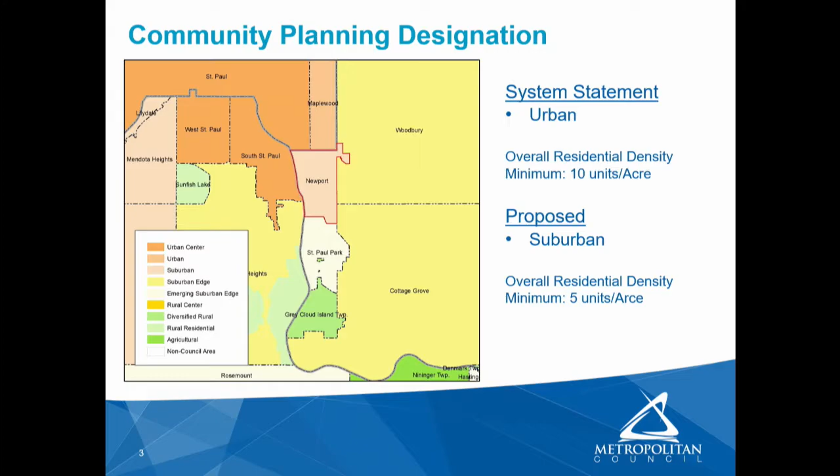A little summary regarding the community. Newport is located in the southwest portion of Washington County. It's located in Council District 13. Its wastewater plan is consistent with the growth forecast that the council has assigned to the community.

The plan reflects its ability to accommodate this growth through a combination of new development and redevelopment within the community. Its land use plan guides residential land uses that reflect an overall minimum sewer residential development density of 6.3 units per acre, so it satisfies that minimum sewer development density of 5 units per acre.

The plan states that the city currently has 78 subsurface sewer treatment systems, or septic systems, within the community, each serving an individual specific property. The city has generated excess peak wastewater flow discharges into the regional wastewater system, which has resulted in the assignment of an I&I mitigation work plan to the city by the council.

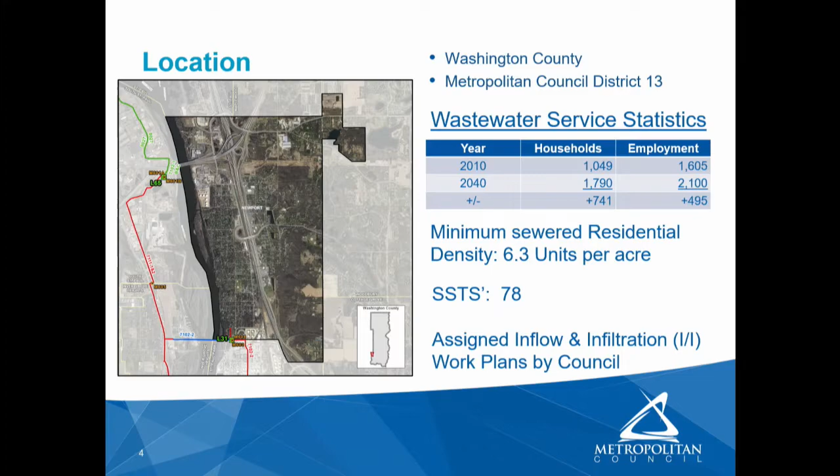As such, the city has been identified as a contributor of excess I&I to the regional wastewater system. Since 2011, the city has completed more than $460,000 in local I&I mitigation work, with over half of that work being funded through multiple state bond grants administered by the council.

The majority of the work completed by the city has focused on public infrastructure improvements, but they have also completed some private property work. It's also important to note that state bond monies can only be put toward work on the public side of the wastewater system. The plan includes policies, strategies, and goals for I&I reduction in both the public and private portions of the wastewater collection system.

And it includes an ordinance that prohibits the connection of downspouts, rain leaders, and sump pumps to the sanitary collection system.

Planning done by the region and the communities within it clearly supports Thrive-driven outcomes and principles. Sound asset management principles have provided a framework for stewardship of the wastewater system that supports a prosperous region. The wastewater system protects public health and the environment.

The management of our wastewater systems has led our region to sustainable practices such as best management activities for our infrastructure assets and inflow and infiltration programs, to name a couple of examples. This work is ongoing and will continue in the foreseeable future.

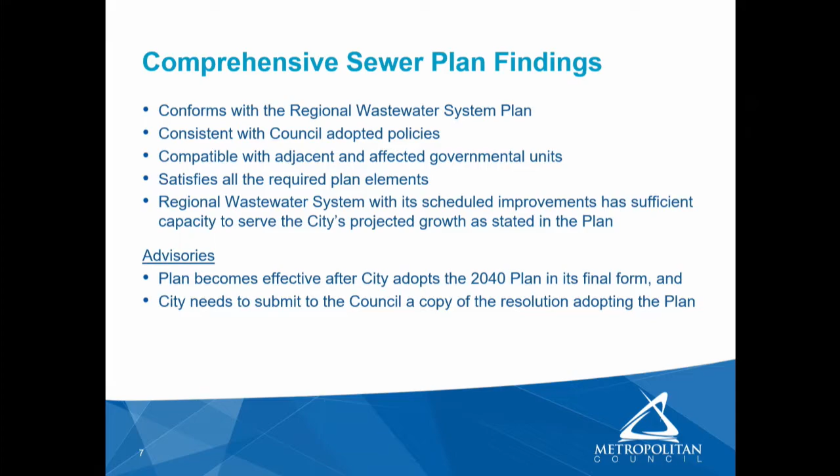There are also 2 advisory comments included in the business item. These are standard to all plans that come through the council for action. The plan will become effective after the city officially adopts its final 2040 plan, and the city is required to submit a copy of the city resolution that adopts that plan.

So with that, the proposed action before the committee today is that the Metropolitan Council adopt the advisory comments and the review record, and approve the proposed recommendations of the Environment Committee as written in the business item, which includes the approval of the City of Newport's comprehensive sewer plan component of the city's 2040 comprehensive plan.

So with that, I'm happy to answer any questions and then also take any suggestions on what the committee might like to see in future presentations. Any questions for Mr. Colvin?

Councilmember: Thank you, Chair. I just have a point of information question, but on St. Paul Park, is that considered the emerging suburban edge? I just couldn't tell by quite exactly the color.

Mr. Chair and members of the committee, St. Paul Park would also be a suburban edge. So a suburban edge community is one that, in terms of its land development patterns, would be a little less urban, if you will, than what a suburban community would be.

Okay, thank you very much. Any other questions for Mr. Colvin?

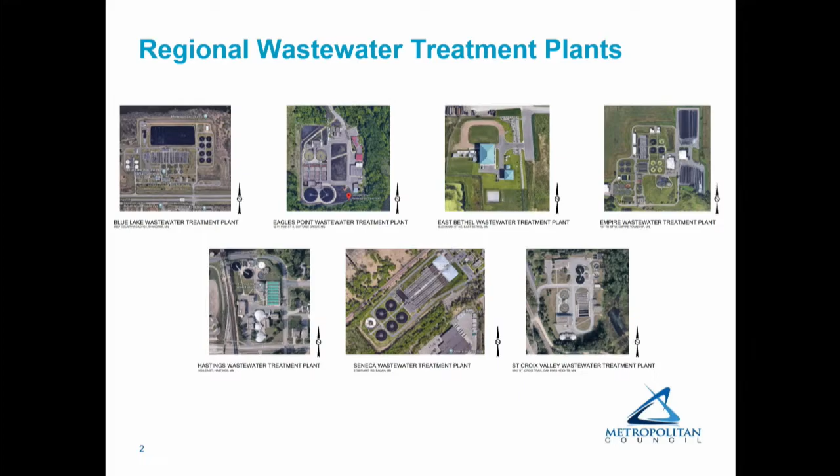On February 20th, 2019, quotes were received for the new telecommunications equipment for the regional wastewater treatment plants. The lowest responsive and responsible bidder bid was submitted by CDW Limited Liability Corporation in the amount of $1,280,787.24.

On that basis, staff recommends that the Metropolitan Council authorize its regional administrator to award contract 18P156 in the amount of $1,280,787.24 to CDW Limited Liability Corporation for the purchase of network equipment, which includes access points, switches, and controllers.

I guess I'll start off with a question. One thing I know, just at about a 50,000 or maybe 100,000 foot level, is the SCADA -- I imagine you have some sort of a SCADA type system, and does this equipment play into that? Is it important for SCADA?

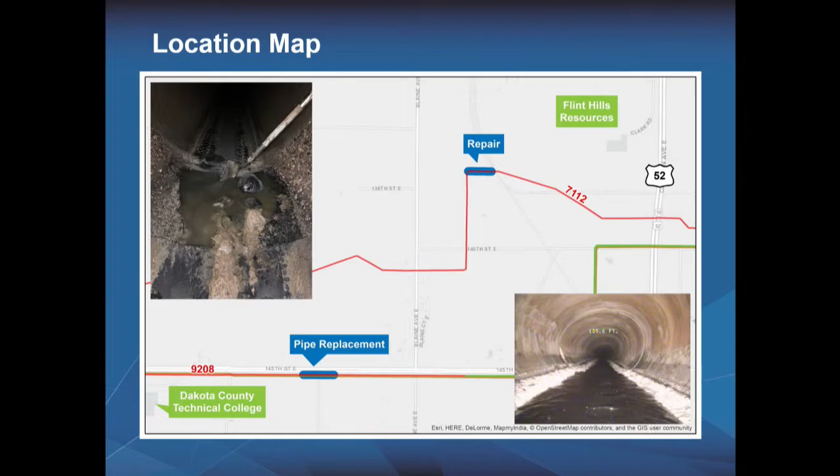So we've come up with a repair scope and estimate. Engineering, and that scope includes engineering services and support to repair the work.

Interceptor 9208 and replacement of 500 feet of lineal pipe, a 36-inch diameter, along Interceptor 7112, installation of new structure and rehabilitation and replacement of the 48-inch diameter segment of pipe. That's the one with a hole in it.

Both areas need temporary wastewater conveyance and dewatering work, and then there's surface restoration work. The total estimated cost for the two locations, the two separate areas, is $1.2 million, and the cost of the work will be funded out of our 2019 MCES authorized capital program.

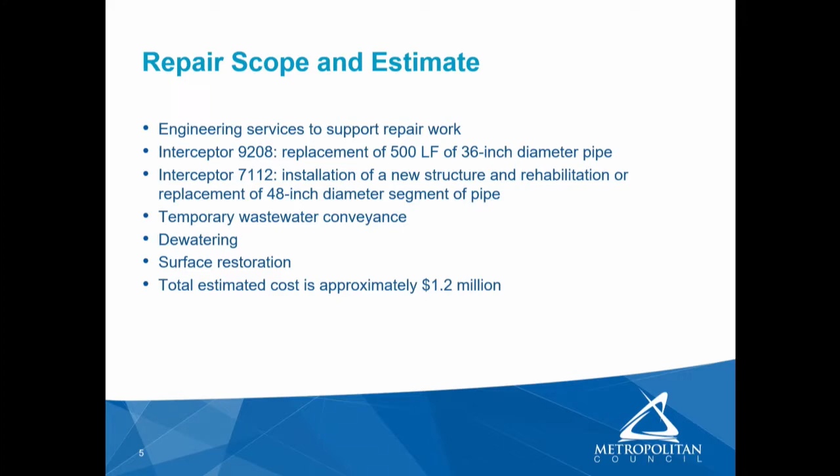I have to do this at least once.

So this action advances the Thrive outcomes for stewardship. Public financial resources will be invested efficiently and effectively to maintain and restore existing capacity to existing wastewater infrastructure, which protects our region's natural resources.

So our proposed action is that the Metropolitan Council ratify the justification for the declaration of emergency for repairs to Interceptor 9208 and 7112 in Rosemount, which is attached to this business item. And I would be happy to take any questions from the committee.

I have a question. How do you temporarily convey? I knew that question was coming. It's a simple question, and I'm sure it's not a simple answer. Oh, we have pictures coming up.

The best way I can explain it: we can never turn off our wastewater. We can't back people up, we can't spill it on the ground. It's kind of like repairing your garden hose that has a leak in it without ever stopping watering your garden.

It involves making connections upstream and downstream. In this case, we pump the flow temporarily around the bad section of pipe so we can get into the pipe and do our work, and then we have to convey the flow back into the pipe. So you'll hear over the next year or so quite a bit of talk about temporary conveyance. It's one of our major expenses in any repair in the interceptor system.

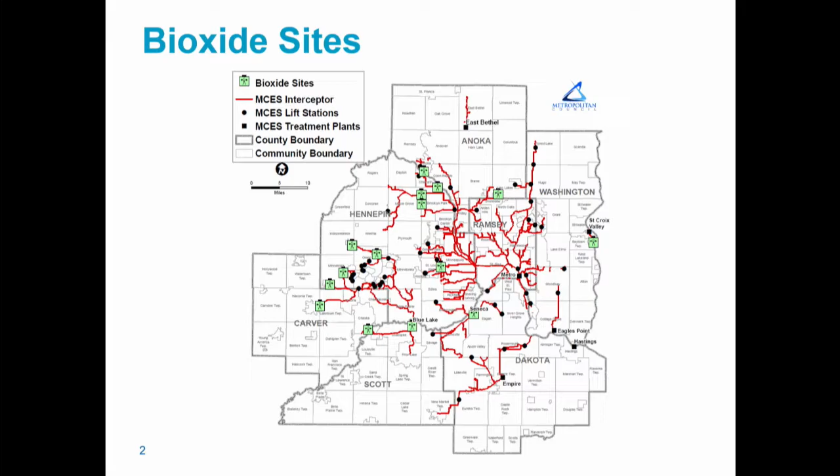We collect and convey wastewater from communities and take it to one of our 8 wastewater treatment plants. To control odors out in the system and control corrosion of the sewage on our conveyance system, we have for many years added a liquid chemical called nitrate salts, or bioxide. You'll see bioxide sites on the map in front of you. We've had a successful program for a number of years, with 15 locations in our collection system where we're adding this liquid chemical to the sewage flowing by, for the purposes of controlling odors and reducing the corrosive impact on the conveyance system. We've contracted out for these services for years, and the contract has been with Evoqua, our current vendor.

To provide the nitrate salts, which is to provide the chemical. And then what's important is, as part of the contract, they also provide the equipment at the 15 sites. The equipment will include storage tanks for the liquid chemical, and it will include the pumping and distribution equipment, as well as they provide services. They go out and add chemicals to the system, they change the dosage as needed, they ensure that everything's working fine.

So as part of the original contract, Evoqua bid and was a successful bidder to provide the liquid chemical as well as the storage tanks and the chemical delivery equipment at the sites.

This has worked out good, and then subsequently we've needed to bid other contracts. Well, what's happened is because Evoqua put in the original equipment, they have a competitive advantage over other suppliers of the liquid chemical. So we've gone through a bidding process here in recent years where we've gone out, we've pursued competitive bids, but we come back with Evoqua has this competitive advantage, and therefore we're not getting responsive bids from other suppliers.

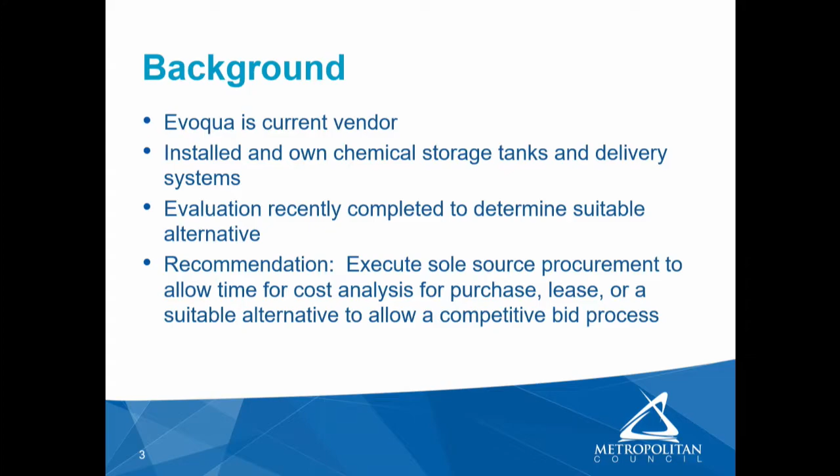We'll try a different Thrive approach. So the Thrive lens analysis for this, stewardship. The public financial resources will be invested efficiently and effectively to maintain proper operation of the Metropolitan disposal system, protecting the region's natural resources.

So the proposed action before you today is that the Metropolitan Council authorize its regional administrator to execute a sole source contract with Evoqua Water Technologies Inc., not to exceed $2 million to provide nitrate salts, odor control equipment, and odor control services to the Interceptor Services Business Unit for the period of May 1st, 2019 through January 31st, 2020.

And I'd be glad to take any questions. Questions for Mr. Arenas? We'll start with Councilmember Fredson, work our way this way.

Thank you, Chair. I'm just interested to know why bioxide sites are located where they are. I'm looking at Ramsey County, and there doesn't appear to be any in Ramsey County, maybe a cluster around Lake Minnetonka. Did you see more? Mr. Chair, yes, we've determined these are strategic locations that will most likely generate odors or have generated odors in the past and or have presented some corrosion problems for some of our conveyance equipment through there. So not every pipe and not every location necessarily provides those conditions, but these we've determined are optimal locations.

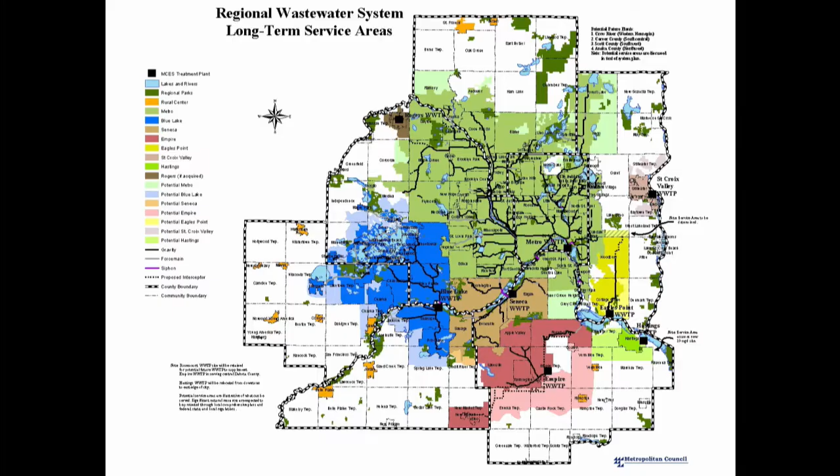So again, because our plants are located close to rivers, we are very in tune to what the spring forecast is for the rivers. So we're one of many agencies that are tied in with the National Weather Service and watch closely their predictions for floods or their projections for floods for the coming spring.

So we last got an update from them on March 18th. They actually are working off of data from March 4th. This is the way they work. They kind of get all their information over the winter, going into the spring, and then provide this projection. But I'll hit a few highlights that their report showed.

So this was as of March 4th, some of the typical spring flood factors. So the soil moisture. For those of you who recall, we had a wet autumn in 2018, and it left the soil moisture above normal before the freeze up, especially across southern Minnesota.

And I talked about some of our plants are in the Minnesota River. What I've found, and I've watched this over the years, a lot of what happens in southern Minnesota, in the Minnesota River Valley, plays into what happens to the river right outside our front door.

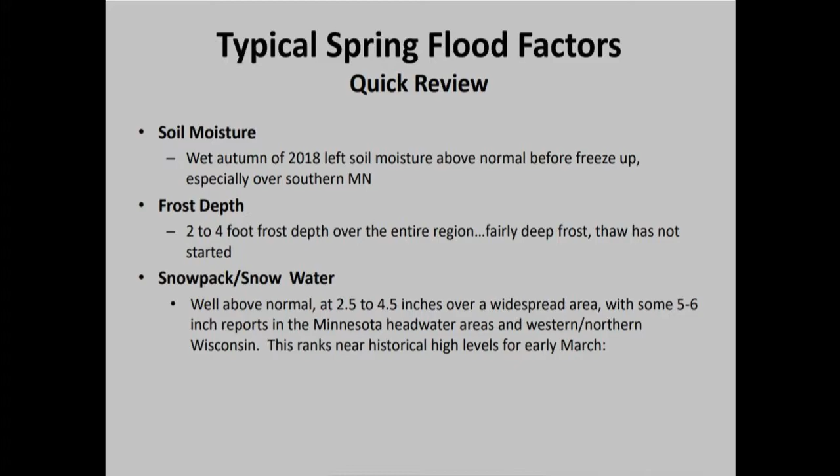This ranks as a historically high levels for early March. So things were kind of teed up for a potential flood season.

So one other slide from the National Weather Service, what they call snow water equivalent ranks. So they go out and not only measure the depth of the snow in the region, but just how much water would be contained in that snow when it melts.

So what it says is that there's plenty of energy out there, or they call it fuel, for a potential flood.

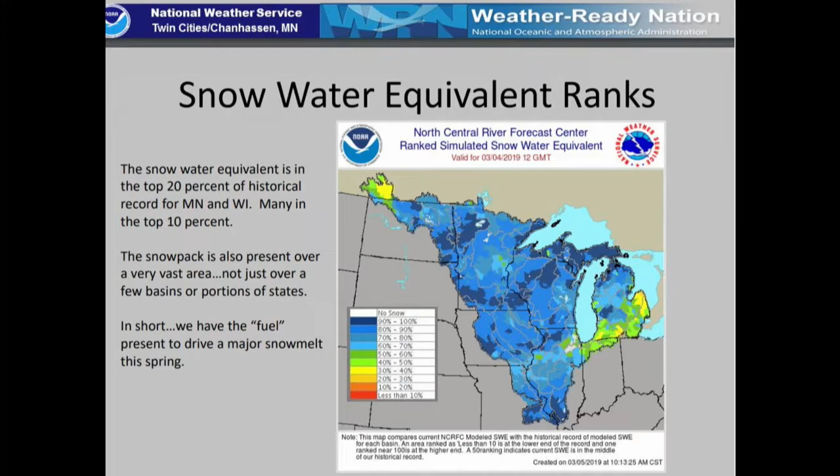So this one, and I'm an engineer, so I'll try not to get too buried in the details. That said, I think I need to unpack it a little bit, and I probably have to use the graphics a little bit. So we'll see how this works.

So the National Weather Service prepares these every spring. This one we call the probability exceedance chart. In this case, this is for their river gauge here in St. Paul, located right at Robert Street. It's about the Mississippi River and its likelihood of reaching certain levels.

We can use this to project the potential risk to the Metro plant, since it's just downstream of this. So a couple of takeaways: the blue line at the bottom is 60 years of historical data, showing on average, from the March, April, May period under normal conditions, the chance of exceeding certain levels.

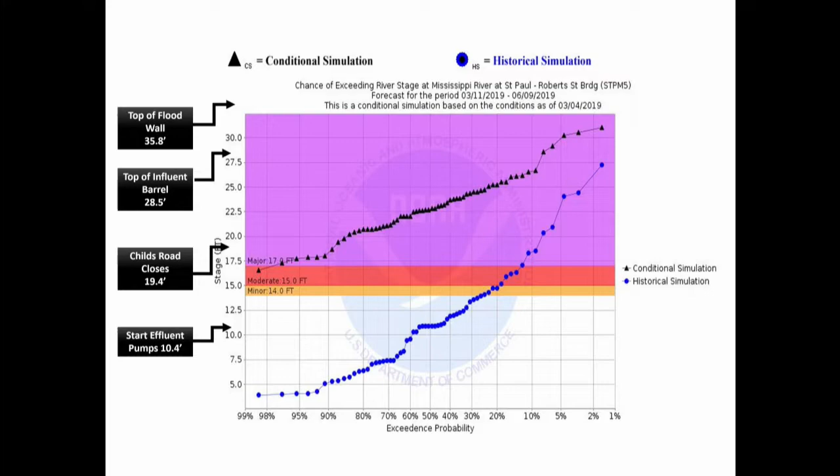I've got some important stages for the Metro plant on the left-hand side of the slide, starting with the effluent pumps. According to this, put together back on March 4th, we probably would be starting the pumps this week. Like I said, it worked out for us — we started the effluent pumps late last week.

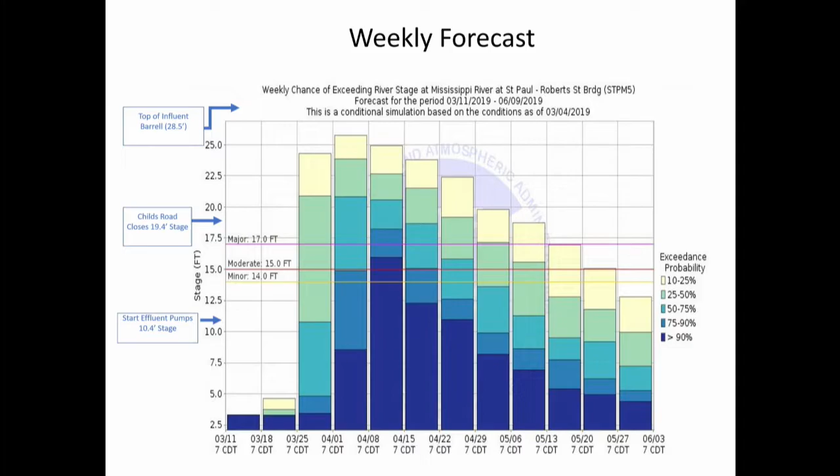What I will say is, I've been with the organization for over 30 years, and we've dealt with a lot of floods, so we're good at dealing with floods. We've got a well-prepared and well-developed flood plan. Our flood committee every year in January pulls the flood plan out, gets together, looks at if it needs to be updated, and starts looking at projections. Some years all the work that committee does doesn't have to be implemented, but we want to be prepared.

We're in the business of providing continuous service in regards to wastewater treatment, and the way to do that is to be able to hold the rivers at bay. As far as the Metro plant flood preparations, there are a lot of activities that take place, but some of the highlights include emergency generators.

Our plants are very mechanically complex and use a lot of electrical energy. We have a reliable feed of electrical energy, but because we're so dependent upon it, particularly for the pumps lifting flow out of the plant, we need to be ensured we have backup power available if the unforeseen happens. So we have emergency generators on site. They're well maintained, and we have plenty of fuel oil for them.

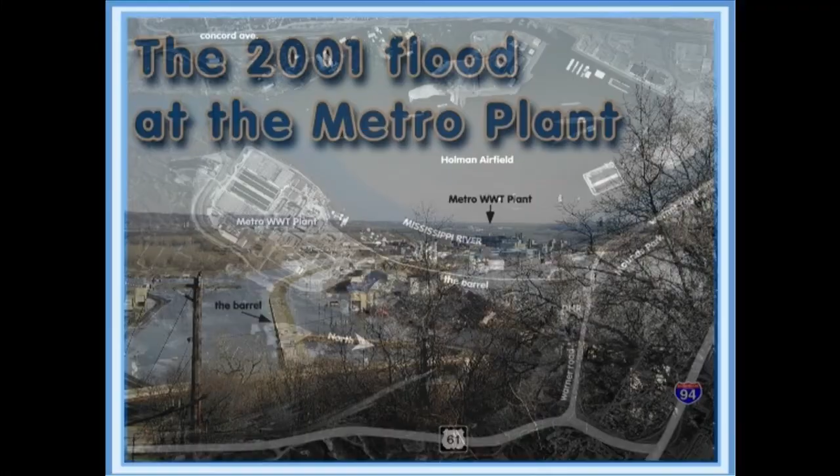You see a little arrow pointing out the plant there. This again is 2001, obviously right over the Metro plant. So a couple of features I'll point out to you here.

So we talk about the barrel. The flow coming to the plant comes from the north, and the Metro plant is a large plant, and the pipes coming into the plant are large. The top of the pipe coming in is basically the width of a good-sized single-lane road, plus it's elevated about 9 feet above the normal level of Child's Road. So it's a good high avenue for us to get our employees into the road, into the plant.

We'll talk about the temporary ramp that we build to use that. But if you look at this photo, you see the barrel clearly out of the water, and you see the Metro plant high and dry, but surrounded by water. And on the upper side of that photo, you'll see Holman Field.

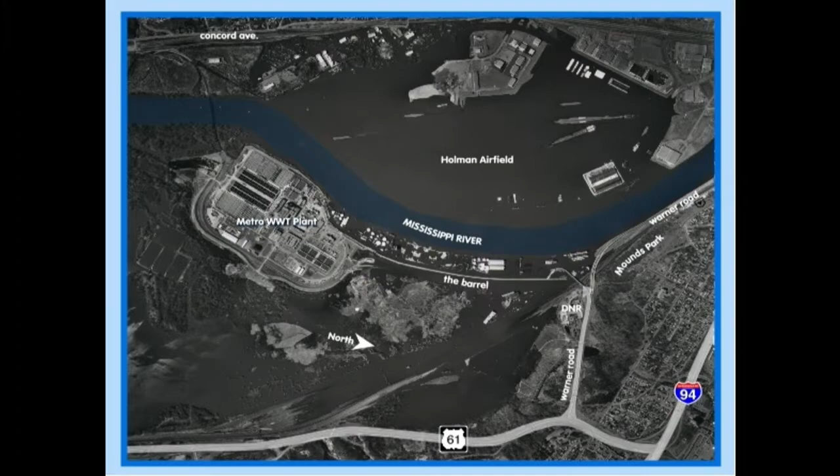One thing that's changed since 2001 is Holman Field got tired of their runways getting flooded out, and they put in a flood wall, I think about 5-6 years ago.

So again, I talked about the barrel and wanting to get to the top of that. We need to figure out how to get ourselves, or our vehicles, to the top of that. So we just build a temporary road right over Child's Road that our employees can drive from - it's really an exit ramp, a higher exit ramp to Warner Road. We can get off of that ramp, onto the temporary ramp, get us on top of the barrel, and safely drive into the plant.

We have about almost 300 people that call the Metro plant their home base. Not necessarily all of them need to be there all the time, but many of them do, and obviously our critical employees need to get into the plant.

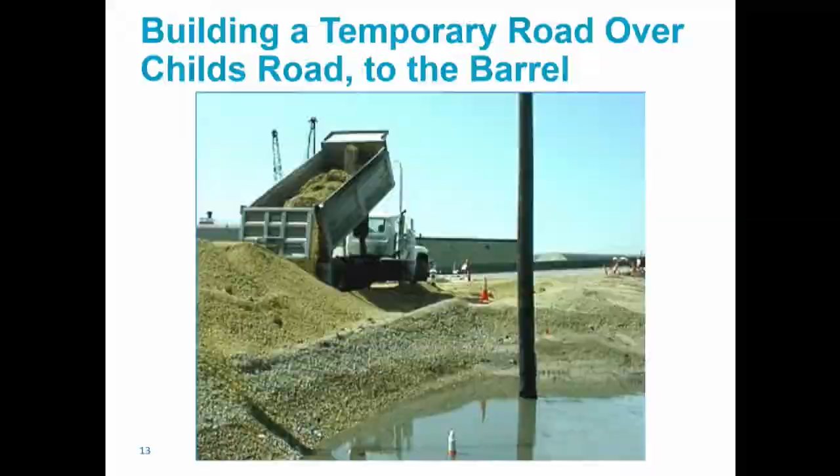So this is them constructing the temporary ramp. Hard to tell, but on the right would be the ramp that would take you up to Warner Road. On the left is the barrel, or the top of our pipe. They're taking gravel to build that temporary ramp. At this point in time, Child's Road, which they're on, was not flooded out.

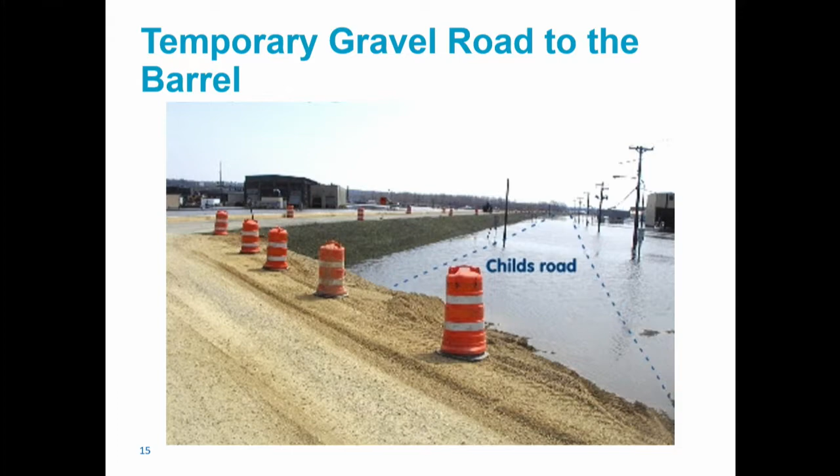This is on the temporary road looking towards the barrel, and you can see now Child's Road has some water on it. Same sort of view here, just stepping back a little bit, letting you see even more water on Child's Road.

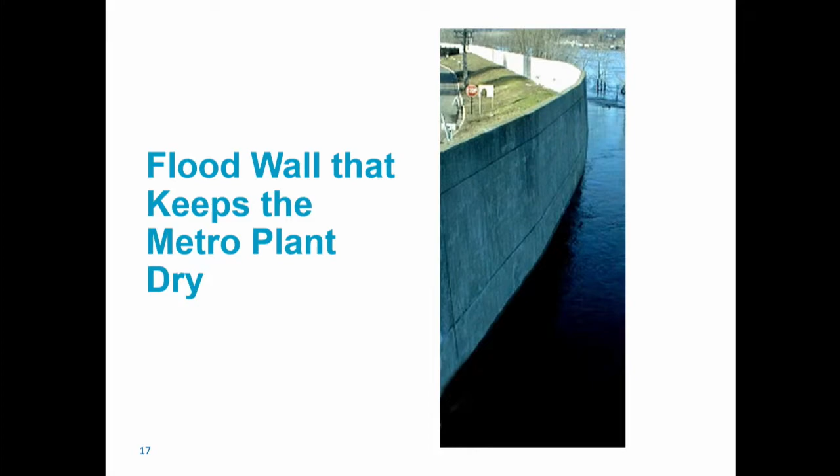Talked about the flood wall, the concrete flood wall. It's been in place since the early 70s, and it's worked just fine for us, again, to keep the river at bay.

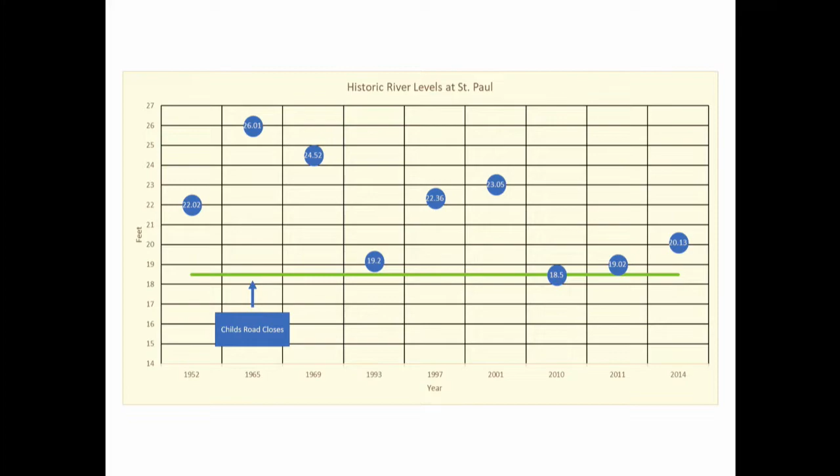We have tunnel systems throughout the Metro plant, and the tunnel systems obviously got flooded with water. A lot of equipment got damaged. After the floodwaters receded, it took a long time to get the plant back up and operating.

That's a lot of focus on the Metro plant. Like I say, we have 3 other plants that we are concerned about.

Maybe I can do that from here. Oh, I better get up there.

So this is our St. Croix Valley plant, obviously on the St. Croix River. They have some different issues and different stages that come into play for them. You can see that for the St. Croix River, the conditions from this spring are much higher than historical conditions, so we would expect some problems there. That said, St. Croix actually sits pretty high, and we have not had to do many mitigation measures at this point, and the projected crest shouldn't cause us much problem.

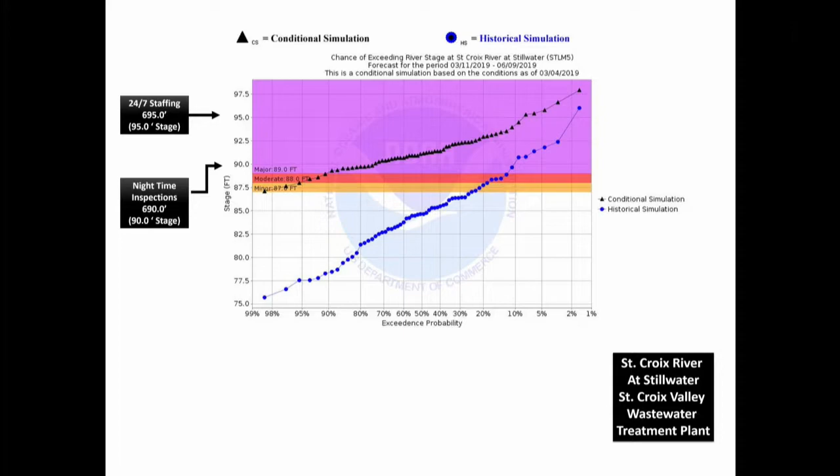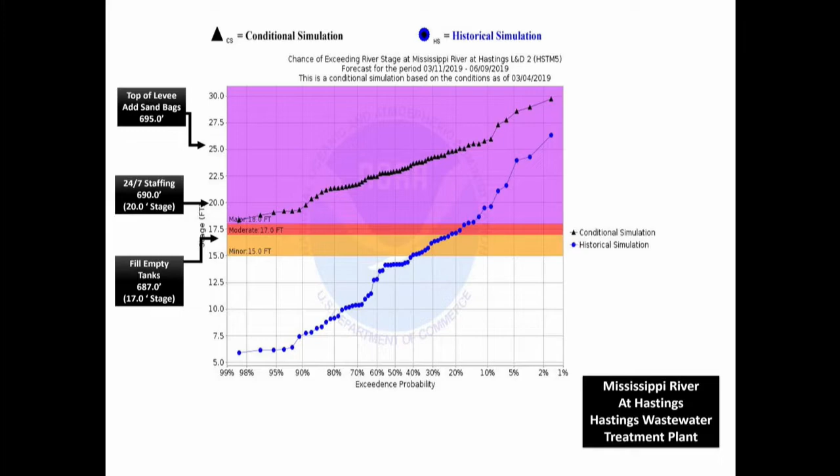Actually, we're watching the river. The Minnesota River seems to have reached its peak and seems to be coming down. We've really had ideal melting conditions over the last 10 days. No extra rain, and some nights have been getting below freezing. So the river seems to be headed in the right direction.

But at 32 feet, we have large pumps at Blue Lake as well that lift the flow out of the plant. So we started up those pumps about a week ago or so. And the plant staff's doing a great job of handling those flood conditions.

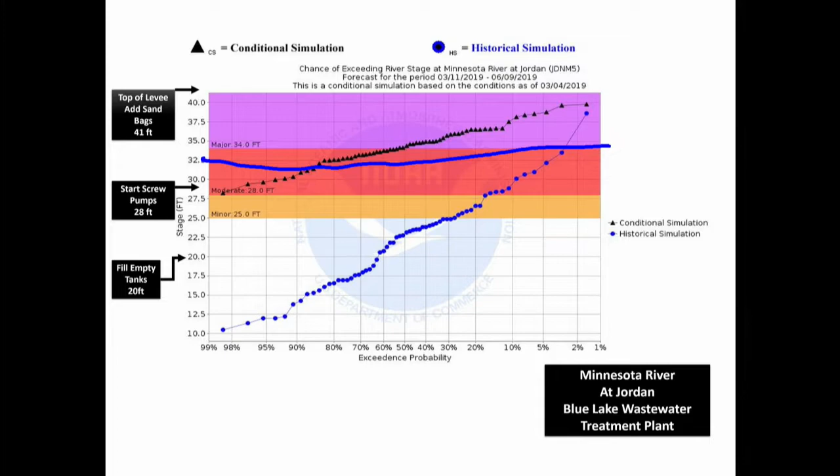Oops. I forgot, Susan.

So again, a little background on our flooding. That said, we did have to declare an emergency for some flood mitigation services for our treatment plants.

Referencing the business item, I've already talked about the spring conditions and how it's ideal for flooding, and that we need to build the temporary access road across Childs Road for access to the plant. There's costs associated with that. Additional costs come up because the Metro plant isn't readily accessible via Childs Road.

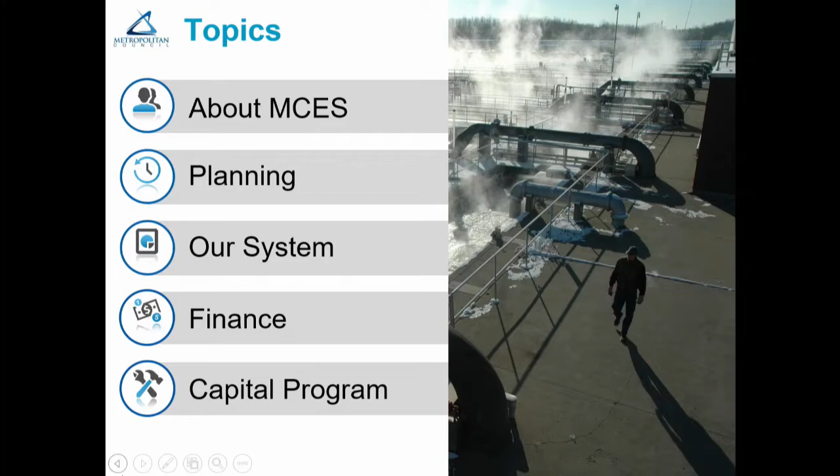Our vision is to be a valued leader and partner in water sustainability. This reflects the emphasis that we place on regional partnerships that we have with our customer communities to ensure clean water and adequate water supply for a thriving region for generations to come.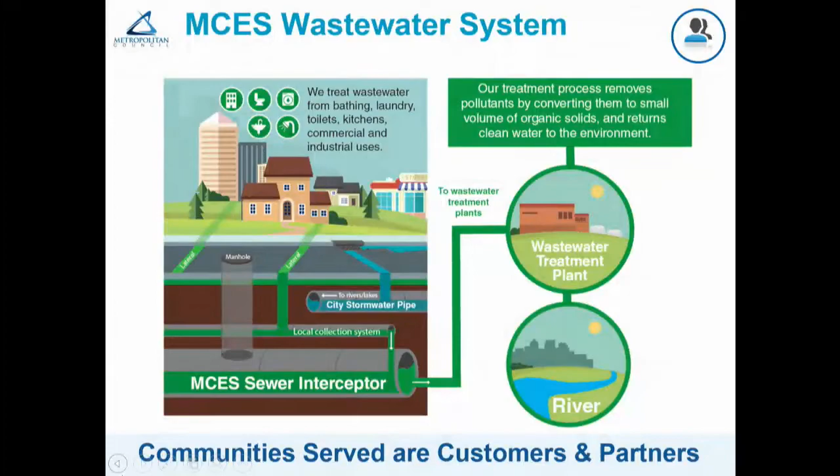So wastewater treatment and conveyance in the Twin Cities metropolitan area is performed as a partnership between the council and our customer communities, and I can't stress that enough. We succeed when our communities succeed, and they succeed when we succeed as well. The wastewater system is incredibly interconnected. We have 7,500 miles of privately owned service laterals that connect homes and businesses to 5,000 miles of community-owned local collection systems. These collection systems then connect to 610 miles of MCES interceptor sewers that convey wastewater to the treatment plants. So our communities are our customers, but they're also our partners.

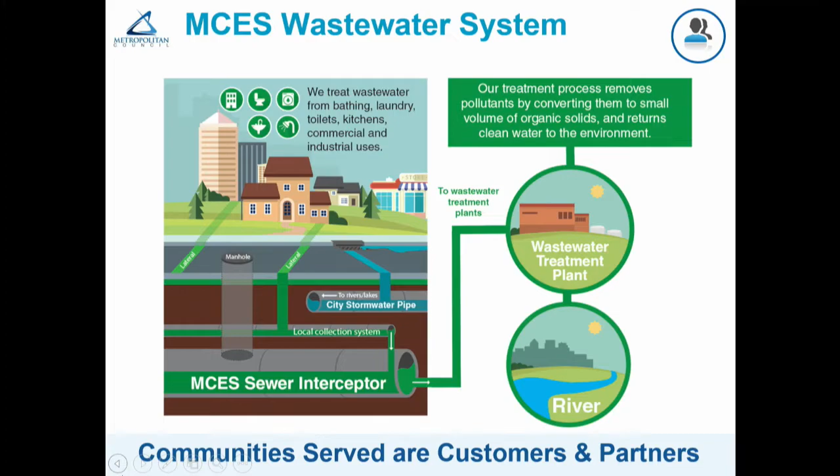Yeah. Grab the remote. Sure.

Mr. Chair, members of the committee, again, I'm Sam Paske. I serve as the Assistant General Manager for the Environmental Quality Assurance Department in Environmental Services. I'll be talking to you a little bit about planning today. We're just scratching the surface. Kyle spoke originally about a plan approval, so this is part of that process overall.

As the regional planning agency, you've been briefed on this, no doubt, to some extent already. We are responsible for planning, but also for operating several regional systems. And in doing so, we coordinate extensively with cities, counties, watersheds, state agencies, and many others to ensure orderly economical development in a livable Twin Cities region. So this is a very high-level scan. We'll have a deeper dive coming for you soon.

So the overall structure: we are guided here, and this committee deals expressly with the Water Resources Policy Plan. That plan is the guiding policy and planning document for our division, and it fits into the Metropolitan Area Development Guide, which is Thrive MSP 2040, the slide you've seen many times tonight. You won't see it here, I believe. And that framework is, again, all about the orderly economical development of our region. The Water Resources Policy Plan also includes policies in the long-term wastewater system plan.

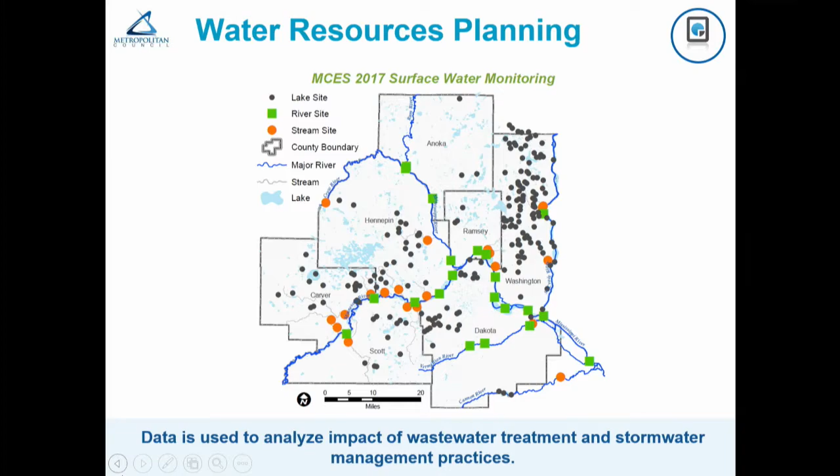Water supply plan. The Met Council supports local water suppliers in their planning efforts. We are not a drinking water supplier, and we do not intend to be one. The region has abundant surface and groundwater sources, but there are many challenges.

We support 8 local water supply working groups with participation from the Met Council and state agencies, and over 50 local water suppliers are represented in these groups. They collaborate on local issues with our support and with support from the state's Clean Water Fund. Current work includes improving water use efficiency, planning for new water supply options in the north and west, and improving the information available for planning.

Burnsville and Savage are an early success story of this approach, where they faced a shortage of groundwater due to a well permit restriction. The DNR is the regulator for groundwater, and they found an innovative way to use water from a quarry instead of the wells they no longer had access to. That model of local collaboration has been developed further around the region, with now 8 groups working together to solve unique local issues that differ across the region.

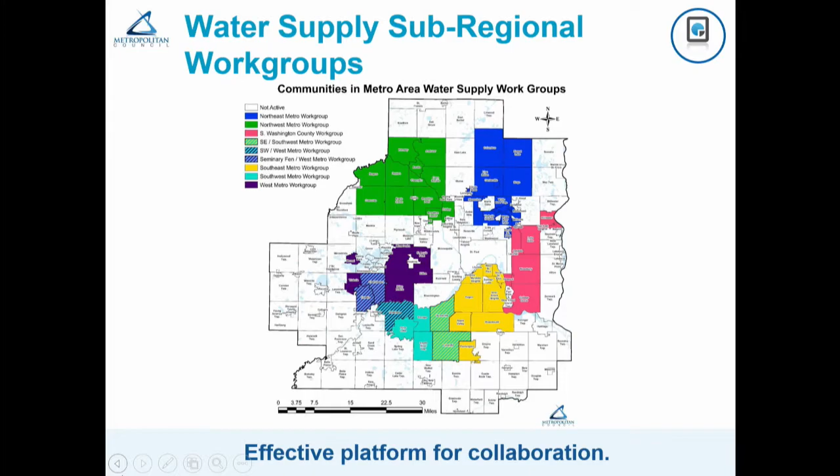So there will be more about planning over the months to come. The rest of this briefing focuses on wastewater operations, and Mike Moranis, I'll get it to you, Mike.

Thank you, Sam. Yep. Mr. Chair, committee members, I am going to just fly at maybe a 5,000-foot level here, just to introduce you to our system.

As said by Janine and Sam, would love to take a deeper dive. Would love to get you out to our facilities. Really, touring our facilities is the best way to get your arms around the complexity of our system.

We talked a lot about the interceptor system today on previous business items, so I won't repeat too much, but again, 610 miles of interceptor pipe bring the flow from 109 communities. Within those communities, for perspective, there's about 5,000 miles of collection sewer that those communities own and operate. As far as size of pipes, some of the pipes coming to, say, the Metro plant are large enough that you can drive a car through them. So we're talking some good-sized pipes here, but they need to handle a lot of flow.

In addition to just the pipes, we have 60 lift stations. We love to use gravity to move our flow along, but there are times geography gets in the way and we need a pumping station that basically lifts the flow up over the hill so we can keep it moving along.

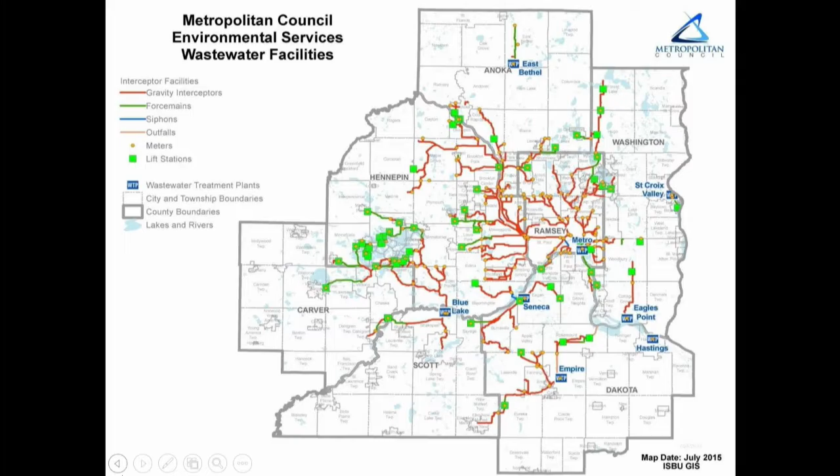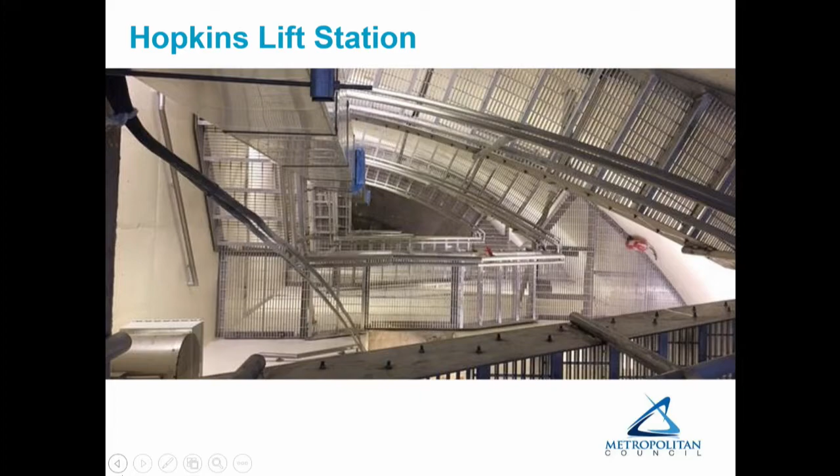Just one picture for you, the Hopkins lift station. Again, we have 60 some lift stations. They can be very mechanically complex. Most of them include their own odor control units. And again, we'd love to get you out to see some of these firsthand.

We'll run through the 8 wastewater treatment plants that we own and operate right now, relatively quickly. The East Bethel plant is located in northern Anoka County. It's our newest and smallest plant, and it's been in operation approximately 5 years or so.

A few specifics about it: it only takes one operator to operate that plant, generally just on weekdays. The other hours, the plant is remotely monitored from some of our 24/7 plants, and if a problem crops up, we'll call in an operator. As far as the capacity goes, a couple things I'll say, and then I won't have to repeat them.

When we say the capacity, in this case, is equal to 0.5 million gallons per day, that's an engineering term reflecting the yearly average capacity of the plant. We recognize the flow varies. Actually, the flow is quite low right now, about 50,000 gallons a day. The flow could vary and might exceed the 0.5 million gallons for a short period, and the plant can handle that, but we rate them on the annual average capacity.

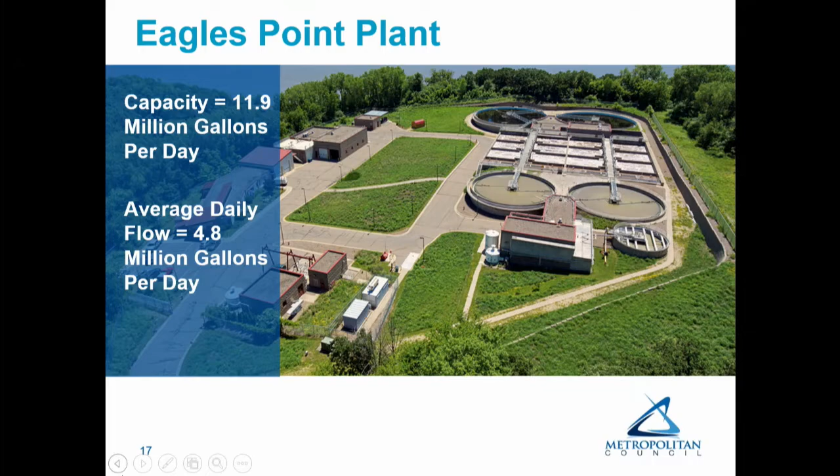The Eagles Point plant is located in Cottage Grove. It serves mainly Woodbury and Cottage Grove area. You can see its rated capacity and average daily flow right now. There's about 10 operations staff there. Again, this plant is not attended at night but is remotely monitored, and it discharges to the Mississippi.

The Hastings plant is relatively small for us. I won't repeat the capacity or daily flow. It serves Hastings and the surrounding area. We have an operating staff of about 4 people there, unattended at nights, and it discharges to the Mississippi.

Can you go back to the slide? So the Hastings plant is right on the edge of downtown Hastings, and this picture is old—it looks like there's a vacant lot with some cars parked next door, but that's actually an apartment building now, part of the city's riverfront redevelopment. We've owned land for quite some time to move that plant, but we're squeezing every dollar out of it, keeping it in use as long as it meets capacity and treatment needs rather than prematurely building a new plant. But someday that's going to have to move, and we're ready for that.

I'm used to hearing about wastewater treatment plants with plenty of buffers around them—here, not so much. I imagine odor control is particularly important, especially to those living in that apartment complex. You're absolutely right, and there's some of our other plants—you probably couldn't pick it up on the St. Croix Valley plant, but there's a set of condominiums just on the north side of the plant, basically just outside the fence line. Odors are of extreme importance to us.

There's an Xcel substation near this area too, is there not? I've talked to city council members about their desire to move this pretty decent size substation. Do you know what I'm talking about? Yes, I can't tell you exactly where, but I have it in my mind's eye. So what's the time frame for possibly making the move? We will be starting our planning process most likely this fall—very preliminary. Then we'll prepare a facility plan, which will require a public hearing and public outreach, and then we'll move into the design process. It takes probably up to 5 years to begin the design, construction, and finally commissioning.

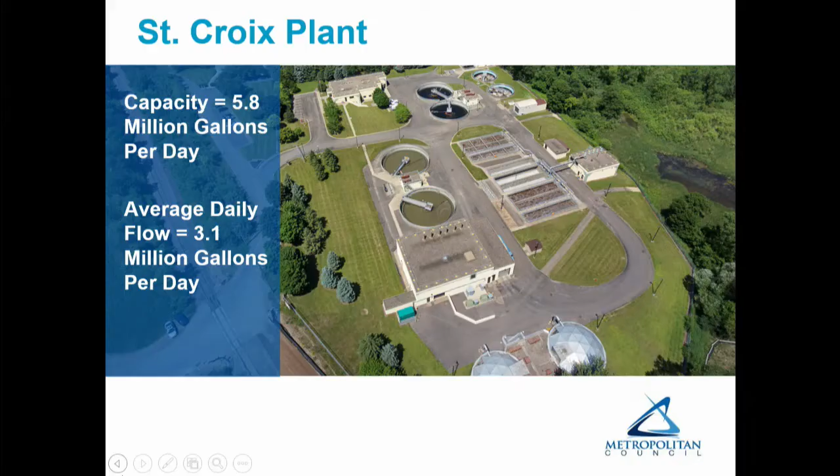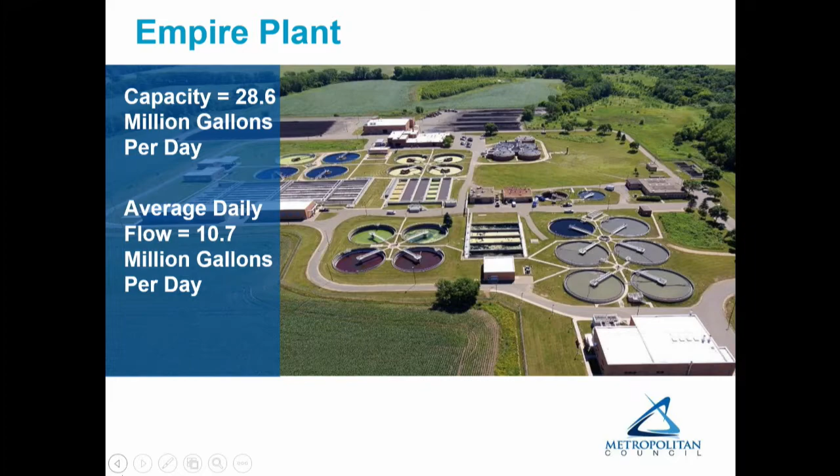I believe I covered Eagles Point. Oh, I'm going the wrong direction—that's why it's looking familiar. The Empire Plant is located in Farmington. You'll notice there's quite a bit of buffer around this plant, more out in an agricultural area. It's a rather large plant for us, serving Farmington, Lakeville, Apple Valley, New Market, that kind of area. Because it's a large plant, this is a 24/7 operation. We have about 20 operators there covering shifts throughout the week, and it discharges to the Mississippi.

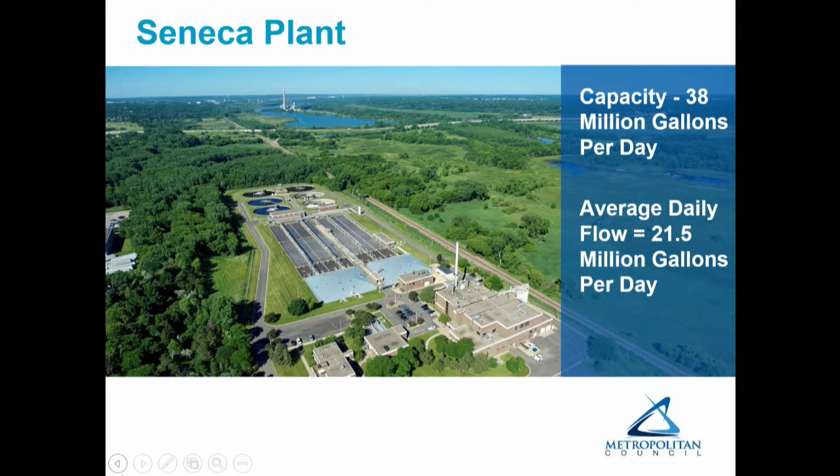Our Seneca plant is located in Eagan and serves mainly Eagan, Burnsville, and Bloomington. It's a relatively large plant, with about 25 operation staff manning a 24/7 operation there. It discharges to the Minnesota River.

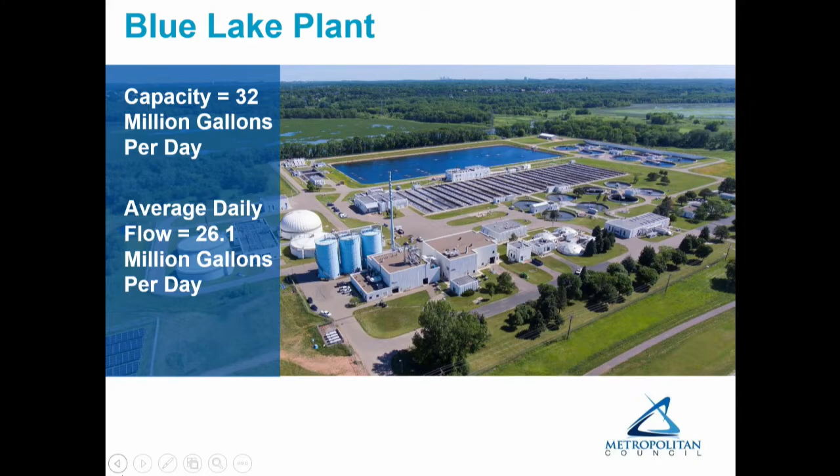The Blue Lake plant, we talked about that a little bit with the flood. Again, a large plant, it serves the western communities around Lake Minnetonka and out in that area. It's located in Shakopee, not far from Valleyfair. There's about 25 to 30 operation staff at that plant, and again, it's a 24/7 operation for us, and it discharges to the Minnesota River.

Our largest plant by far is the Metro plant, our largest and oldest plant. It's 81 years in service now for us, and it's located south of St. Paul, serves Minneapolis, St. Paul, and 60 other surrounding communities. There's about 290 people based at the plant, providing a variety of services. And again, as you might expect, we're a 24/7 operation and we discharge to the Mississippi.

I'll just talk a little bit about compliance. In our business, one of the ways that we determine the quality of our service is how well we're treating the wastewater, and are we doing it in accordance with the requirements laid out for us. So in our case, the Minnesota Pollution Control Agency issues permits that clearly spell out how well we need to treat the wastewater and then how to demonstrate that.

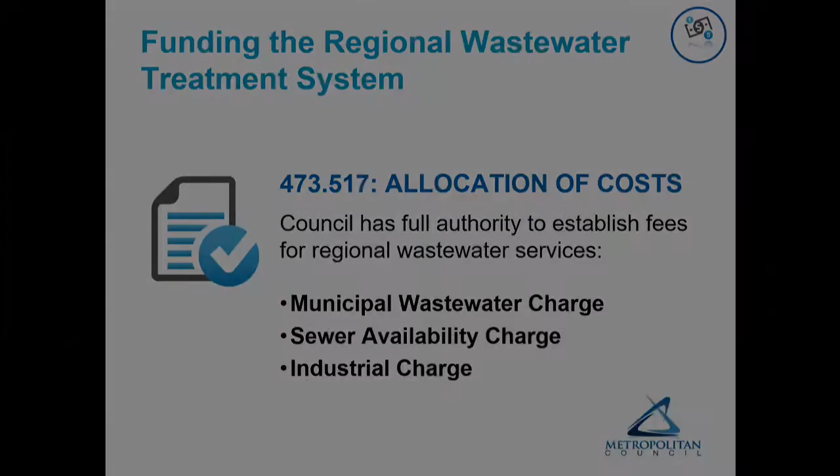Here is for 2019 our revenue sources. The municipal wastewater charge is the charge allocated to customer communities based on each community's share of the total system flow.

Mike mentioned that we have 200 metering stations. Those metering stations document the wastewater flow attributed to each community. 77% of our revenue comes from our customer communities, so cities pay 77% of our revenue. Then we have industrial charges charged to our industries for high-strength waste that exceeds domestic wastewater strength, about 4%.

We also have the sewer availability charge, which is collected from cities to pay for wastewater system capacity demand as development occurs. Some other sources include state bond fund appropriations for pass-through grants for public infrastructure, inflow and infiltration mitigation, water supply planning, and water quality monitoring. We get some tax funds from the council, typically for demonstration projects and water supply planning, and we also use some of our reserve funds.

So the majority of our revenue is fee for service. Our expenditures, as you can see on the chart, over half are paid for operations, maintenance, chemicals, and services provided to the regional administrator's office, including HR, risk, the Office of General Counsel, and communications. The other half, about 46%, is used to pay for debt service associated with our capital program.

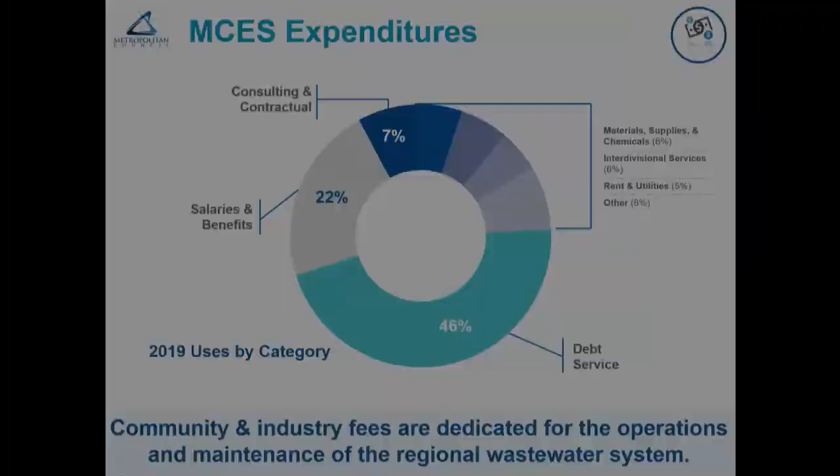This is the chart that we in environmental services really take pride in. In 2016, the average household in the Twin Cities paid only $274 a year for wastewater service. I think that's pretty remarkable when you think about affordability. That $274 a year is the average across the metro, and that includes city utility fees.

What happens is we give the cities our bill for the year. They incorporate it into their utility fee, setting and collecting it from the homes and businesses in their community. Generally, the MCES utility fee is about 50% of what a city might receive in revenue from their residents and businesses.

So on to this chart, our rates are some of the best in the country. Mike talked about our performance, and our rates are some of the best. This graph is from the 2017 NACWA survey with 2016 data. The rates shown here are retail rates. We are the fourth lowest of the

23 peer agencies that report to NACWA. Those agencies are ones that serve over 1 million people a year. MCES is 40% lower than the average rate of $468 across the nation, so we're 40% lower than the average rate.

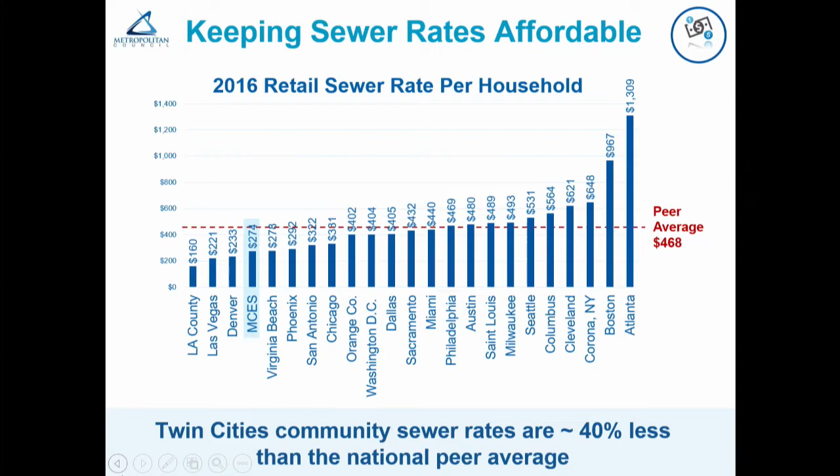I believe Ned will talk to you a bit more, and he'll also bring in Kyle Colvin, who will talk about how the municipal wastewater charge is calculated for each community. So on to the capital program.

The capital program has three main goals, and we'll take a deeper dive into this in late April. First of all, it's to preserve assets. $7 billion worth of infrastructure requires an annual investment into our asset management program. We need to ensure our wastewater system continues to meet growth, regional population growth. Councilmember Wolf asked the question when the Newport plan was approved.

Is the plan consistent with the regional wastewater system? Do we have adequate capacity? We constantly keep an eye on that, because one of our high levels of customer service is that we never want to tell a community that they can't implement the growth they want to see in their community because there's not adequate wastewater service. That would be something we would not want to do.

I mentioned a little bit about our capital program drivers. There are six of them. I mentioned business process improvements. I also want to call out infrastructure coordination. We work very hard at working with MnDOT, all of the counties, and all of the communities. If they have a road or highway project, we want to make sure we're part of it, improving our system along with their project so that we don't come in behind.

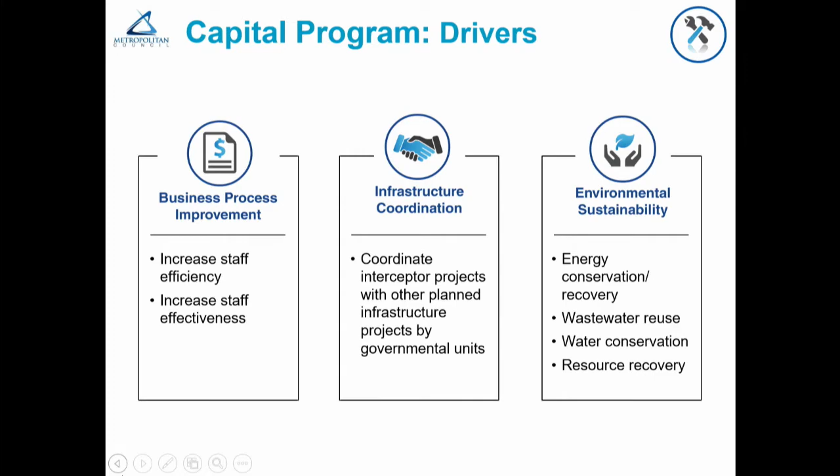We also have improvements associated with customer service. Mike mentioned odor control - we're always working on odor control facilities. And as you see some redevelopment in communities, some areas that never saw redevelopment are now becoming more intense with residential. That increases our need to become better at odor control.

Performance assessment in terms of safety, reliability, and condition assessment. Adam talked about our condition assessment program for interceptors - that was on our gravity pipe. We also do that on our force mains, and we have a systematic condition assessment program on all of our assets.

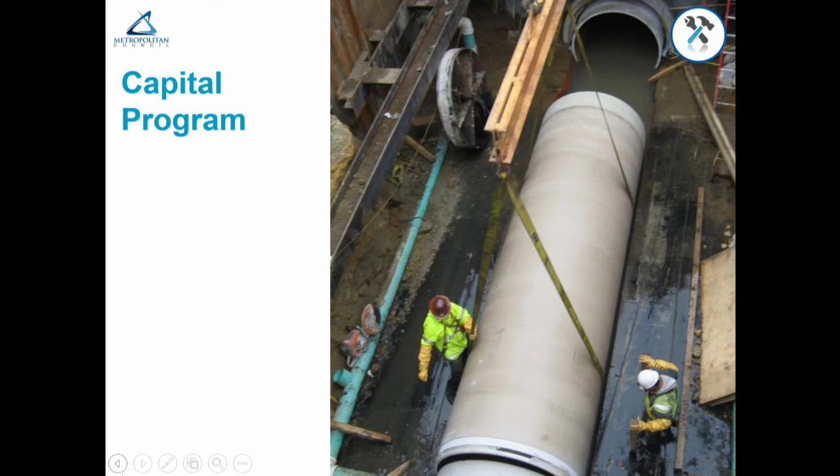Here's some pictures to wrap up with, just a taste of what's to come. You're going to see a number of projects - about 80 to 100 million of our 150 million spent every year is in the interceptor system. This picture shows a slip lining project, one of the methods we use to rehabilitate our interceptor system.

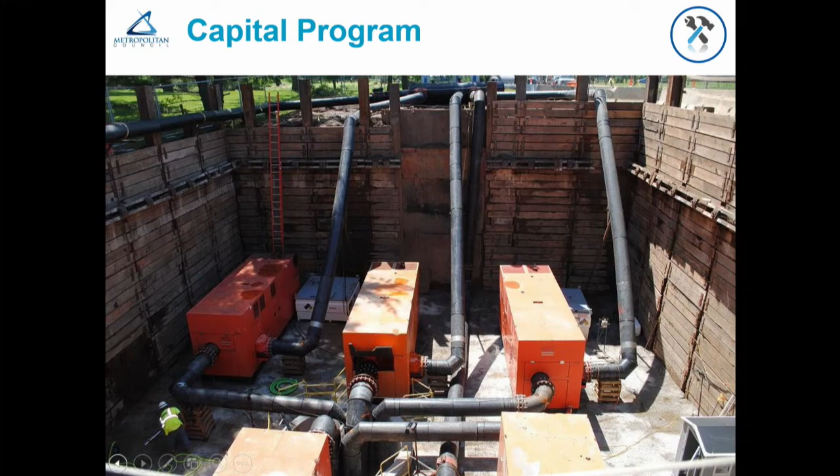Mr. Chair, you asked about the conveyance system. This is a picture of a conveyance system set up in the Phalen Park area to temporarily convey wastewater out of the collection system into an above-ground piping system so we can repair it. We have some of these in place just over in St. Paul on the Beltline project - we'd be happy to show you. The reason this is so deep is that the pipe is about 25 feet deep, so these are very big structures we put in to temporarily convey the wastewater.

Mr. Chair, when are we going to have the big pipes like that in Minneapolis for their big project?

Mr. Chair, Councilmember Wolf, that project is out to bid. Councilmember Wolf is talking about the RO4, the Minnehaha Park area sewer improvements, I believe, and that project is out to bid - we should see those pipes in the area probably late fall, and those are going to be very, very big pipes. Wow, thank you.

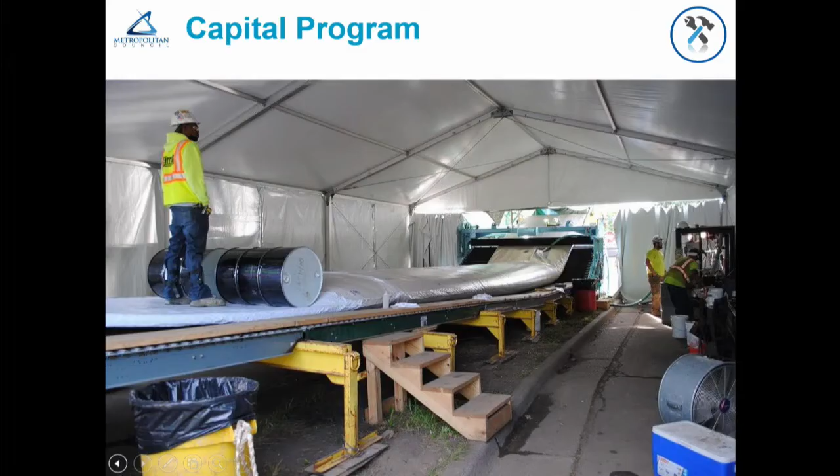This is a shot of inside a tent that's used to lay out the cast-in-place or cured-in-place pipe. This is a trenchless rehabilitation method used to repair existing pipelines. It's jointless, seamless - it builds a pipe within a pipe, and allows us to rehabilitate pipes ranging in diameter from basically 4 inches to about 110 inches.

The largest pipe we've rehabilitated using this methodology is 96 inches. It's the facility that runs right by the Minneapolis water treatment plant, and it conveys wastewater from the North Metro area through Fridley and Brooklyn Park.

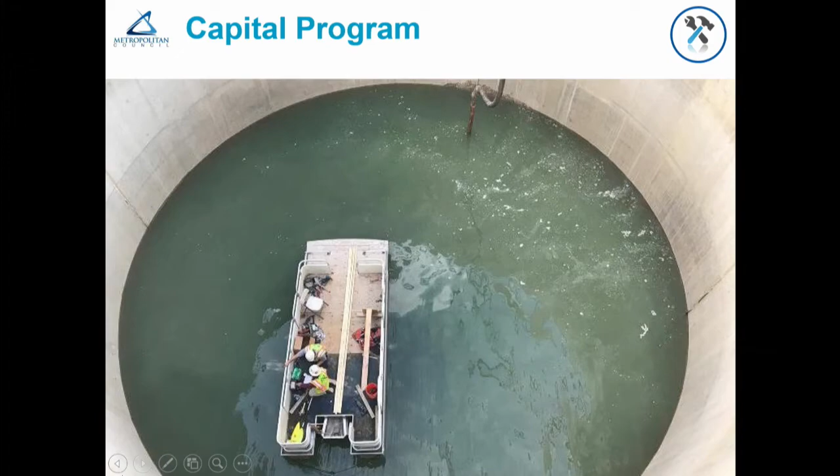Mike showed you the picture of the Hopkins lift station as it's near completed. This is a picture of the caisson for that facility being sunk. Our interceptors are usually quite deep and located near shallow groundwater. In this photo, we're sinking a caisson that's part of the lift station. We wanted to minimize the dewatering necessary to build the caisson because we didn't want to damage adjacent structures. So the contractor had to use creative methods to work within the caisson - he floated a pontoon inside so he could work within it and continue to make progress on the project.

That project will be coming before you because we will be presenting a contract for owner's agent representation. We plan to do this as a design build project. So more to come on the capital program. With that, I know the hour is late, but if you have questions, I'm sure we'll be happy to answer.